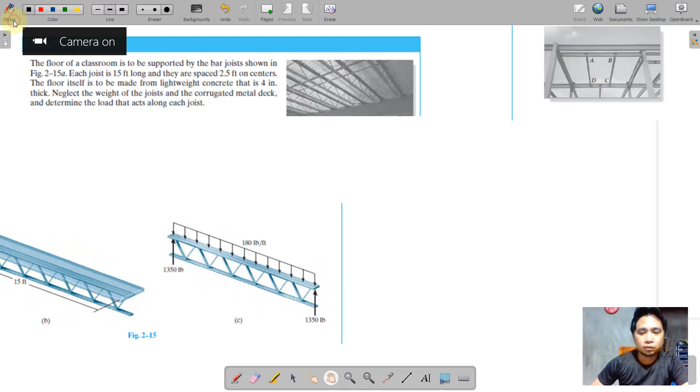This time we are going to have examples on tributary areas, how these tributary areas shall be transmitted on the structural member. And we should know first the tributary area, whether it is a one-way system or two-way system.

In this case, we have a floor of a classroom to be supported by the bar joist shown in this figure, and it is 15 feet long and spaced 2.5 feet apart. The floor itself is to be made from lightweight concrete that is 4 inches thick.

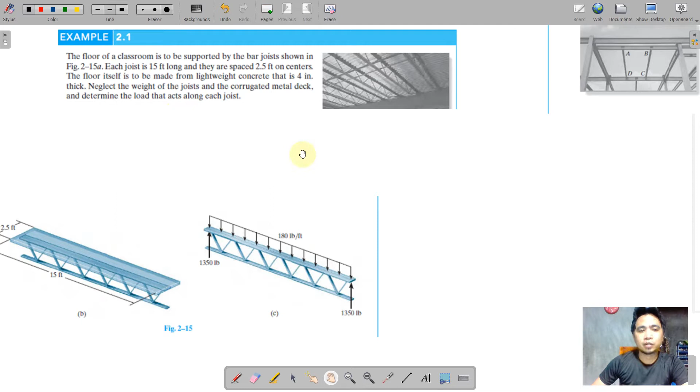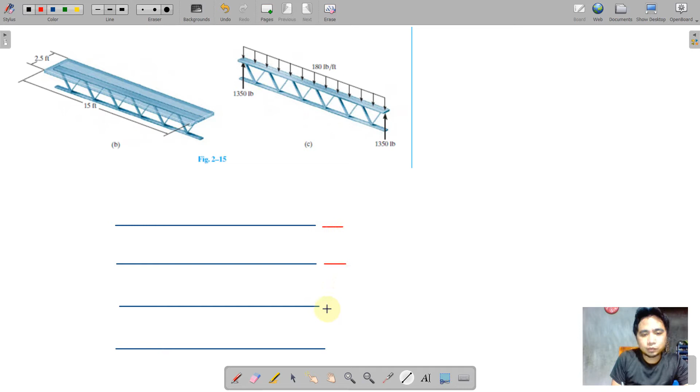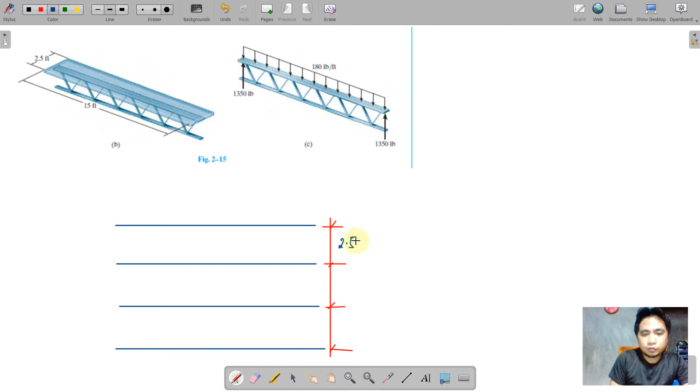Neglecting the weight of the joist, we are going to determine the load that acts along the joist, meaning it is just the distribution that we need to compute. So let's look at the top view, where we have a series of joists that are equally spaced, spaced 2.5 feet apart, and we have here 15 feet.

Recalling our initial knowledge on one-way and two-way slab, we should investigate the ratio of the longer dimension to the shorter one. If L over S is greater than 2, this is one-way system. And if the longer dimension to the shorter one is less than or equal to 2, this should be treated as a two-way system.

As a clue, a one-way slab looks like this: there is an obvious rectangular section wherein the longer one is twice the shorter one, or more than twice the shorter one. So that is the rationale. And if we have a two-way system, we have only a slight difference between the longer dimension and the shorter dimension.

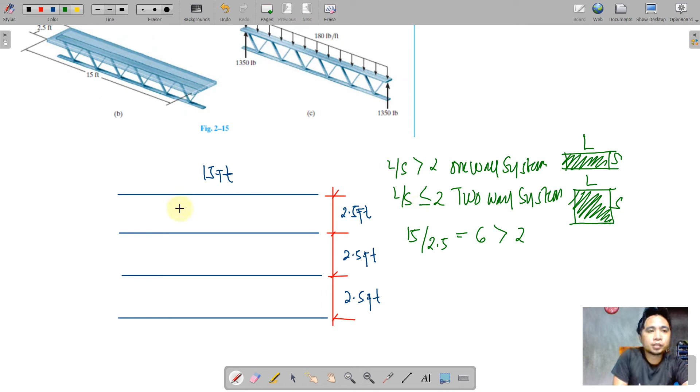So if it is a one-way system, we do not have to create a 45 degree line on the edges for its distribution. Instead we are just to consider half of the dimension of the adjacent flooring on both ends.

So if that is the case, we will be having a tributary area of 15 by 2.5. This is 2.5 because although we have them, they have half of 2.5 at both ends, except for the last beam, because the last beam will just carry a single coverage of the half of the 2.5.

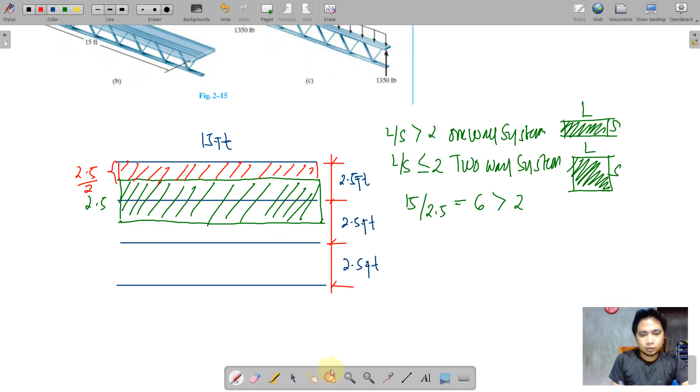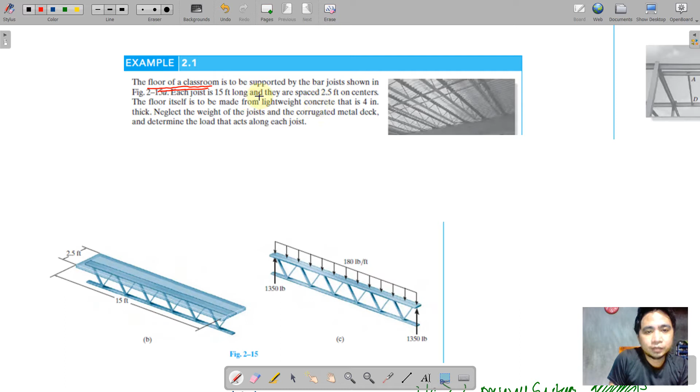So this is 2.5 over 2 on the edges, but we are trying to compute here the maximum loading of this joist in the system. With that, we are now going to determine what will be the loading of this floor system. So in the problem, we should know what is the material being carried by this floor joist, and at the same time, what is the occupancy. Here we have a classroom as the occupancy, and the material is lightweight concrete that is 4 inches thick.

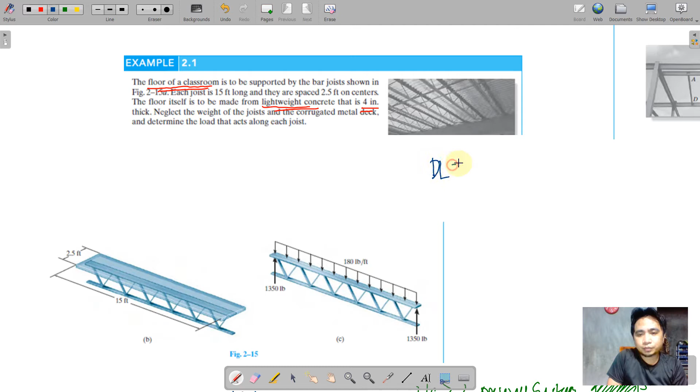First, let us look into the table containing the dead load. I think we should refer to table 1-3. We have here a floor fill that is lightweight concrete according to the problem, and that is 8 pounds per square feet for the English system, per inch. So floor fill, lightweight concrete, plain per inch, the unit here is pounds per square foot per inch, so that is equivalent to 8.

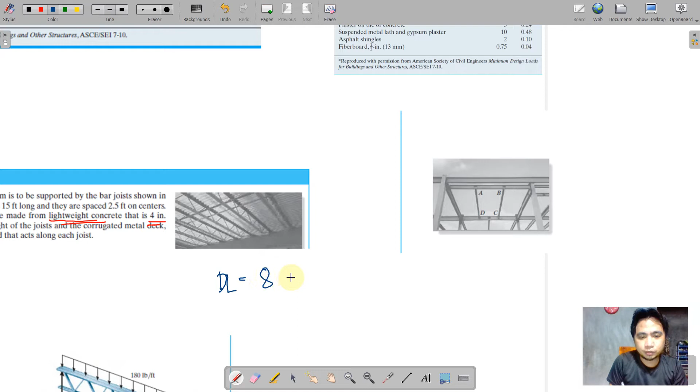Do not neglect the unit because that will be your basis. So we have 8 pounds per square foot, and this is per inch at the same time. How many inches? According to the problem, we have 4 inches. So if we calculate that, the inches will just be cancelled, and obviously that is 32 pounds per square foot. So express first all the gravity loads in terms of pounds per square foot.

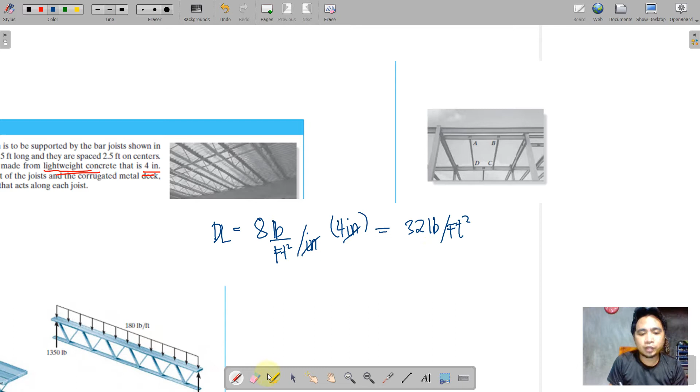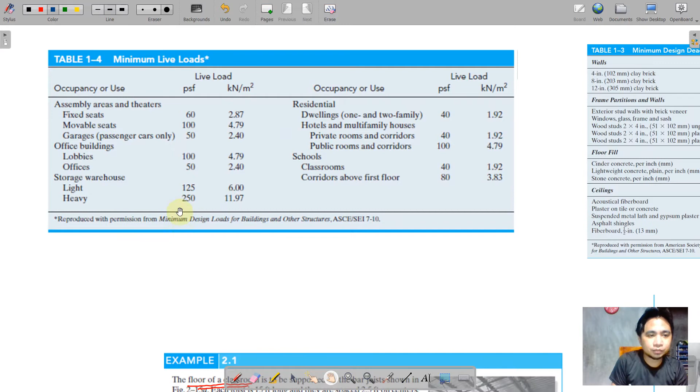Now moving on to the live load, if we have a classroom, we have a classroom that is equivalent to 40 PSF as the live load. So the live load here is 40 pounds per square foot.

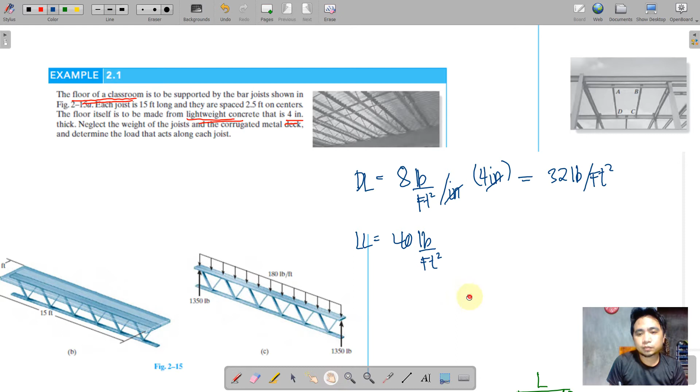So if we are going to add that one, all in all, we have a total load in terms of pressure. Obviously, 32 plus 40, that is 72 pounds per square foot.

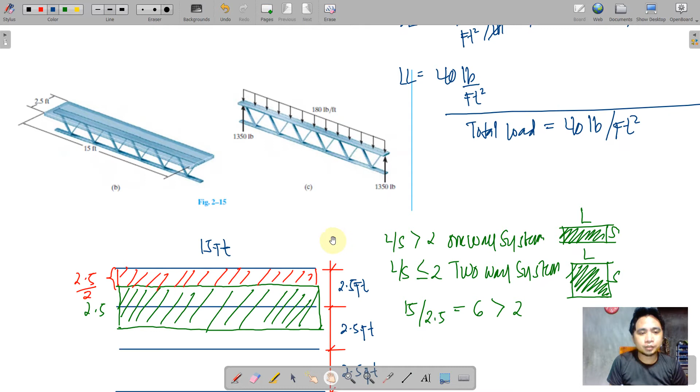And then next, we wanted to distribute this pressure along the length, or along the long direction. Why along the long direction? Because there will be no support along the short direction. At the same time, if we have a one-way system, the shorter dimension has no load to carry.

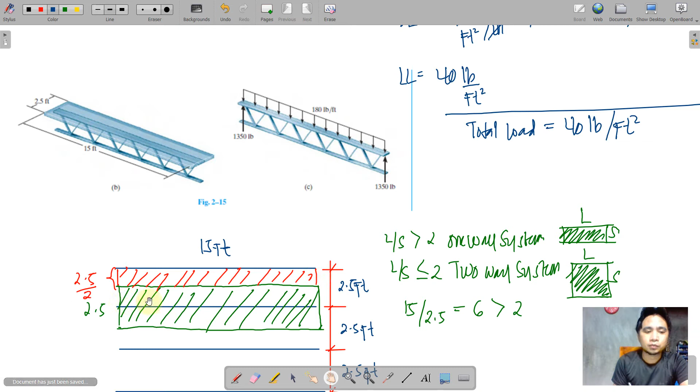So basically, we are going to multiply this 40 to the area. And what will happen if we multiply it by the area? Feet squared here will just be eliminated, and 40 pounds will just be the resultant.

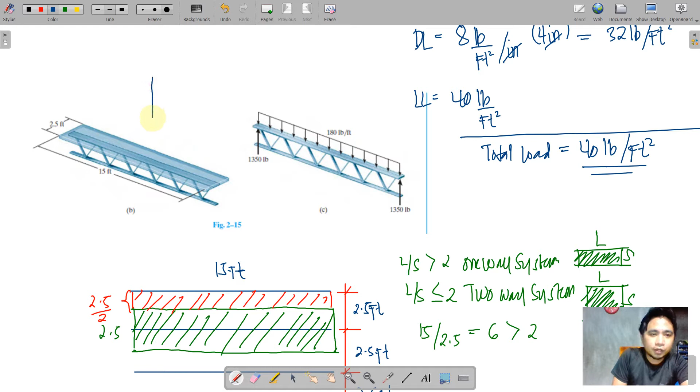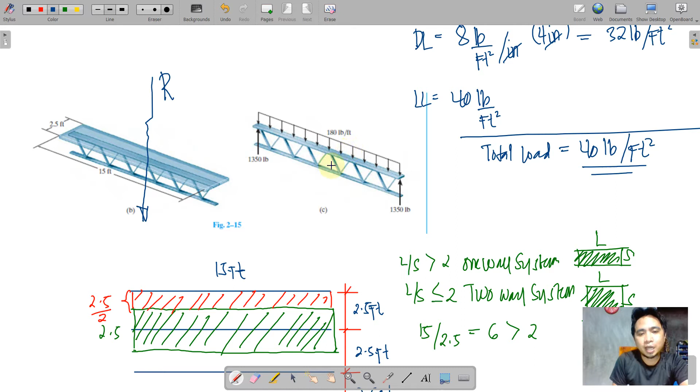It will become a resultant if it is being multiplied by 2.5 by 15. So we'll be having a resultant, and this resultant will be distributed along the length. That is the rationale. If this R is distributed along the length, it will become a uniform distributed load along the length. So that is the pattern of the solution.

So let us do that. We have to multiply it by 2.5 by 15. This is actually the tributary area. This now becomes feet squared, which is just cancelled. So we will be having 1,500 pounds. So we are going to distribute along the length.

So therefore, the W here, or the distributed load along the long direction, is equal to 1,500 pounds. Where shall you distribute? Along the 15. So this is divided by 15 feet. And then we have here 1.5...

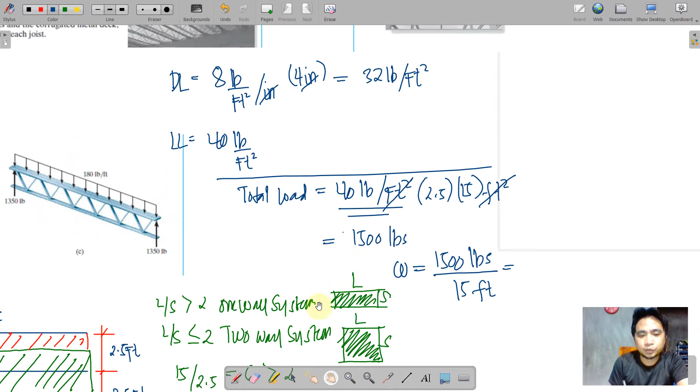Sorry, I'm so sorry, but we have 32 plus 40. That should be 72. So sorry for that. 72 by 2.5 by 15. May we recalculate that one? This shall be equal to 2,700.

2,700 pounds. And next, just the same, we divide it by the length where we wanted to distribute this. 2,700 divided by 15, we have 180 pounds per feet, and this is the answer for this problem.

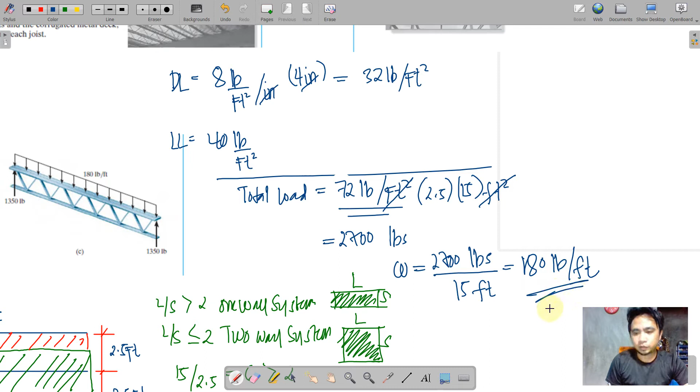Moving on to the second problem. We have here a flat roof of the steel frame building shown in the photo intended to support a total load of 2 kN per square meter over its surface. Determine the roof load within region ABCD that is transmitted to beam BC. The dimensions are shown here.

Obviously, on the dimension, it has already been indicated that this is a two-way slab because it has drawn a 45-degree line on each of the edges, and then we have a trapezoidal loading for the longer span and a triangular load for the shorter span. However, if this is not indicated in the problem, what is important is that we all know the dimensions of this figure.

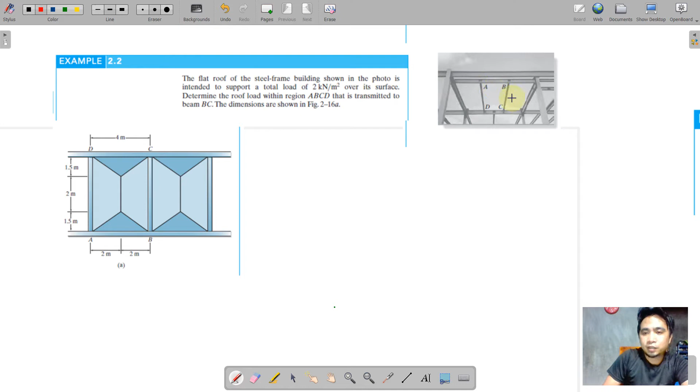So granting that this is equal to 5 meters on the figure and this is 4 meters, we can check the L over S, or the longer dimension to the shorter dimension. This is 5 all over 4. So obviously 5 over 4 is 1.25. Now this 1.25 is less than 2. So in short, there is only a slight difference between L over S.

And if this is the case, then we can say that this is a two-way system. So if it is a two-way system, again, we are going to have lines drawn at 45 degrees on each of the corners, and then just intersect it with this line.

Do not bother yourself by computing the area and then multiplying it by the loading and then dividing it by the length where you wanted to distribute. So what you do is just multiply the area, or we just multiply the loading in pressure. Loading in pressure is per square foot or per square meter.

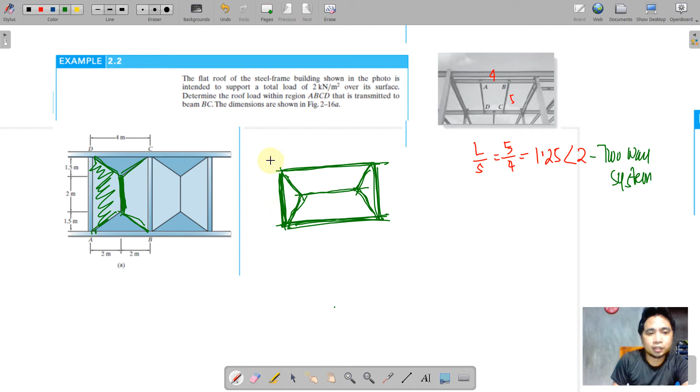So what you do is search for the triangle. Do not go for the trapezoid. Where's the triangle? Here's the triangle. And then look at the dimension of the triangle, or the length of the triangle, that is 4 meters, of course. And then you divide 4 meters into 2. Why? Because as we can see here in the trapezoid, it bisected the 4 meters here, and obviously this is 2 meters. So we are actually determining the peak of the W, and the peak of the W is on this range.

So next, we're going to have an illustration for that.

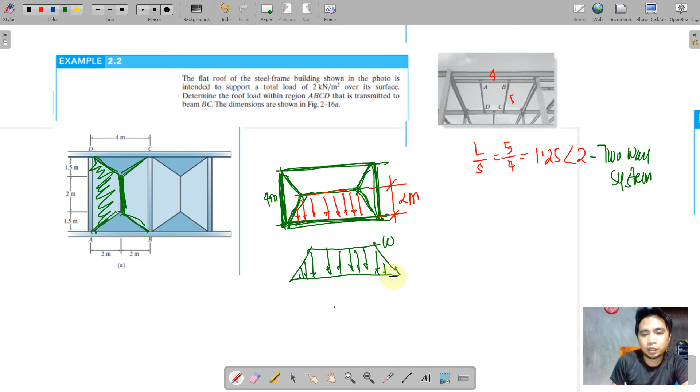We have here a distributed load. However, this is not uniformly distributed, it is a trapezoidal one. Of course we are going to have the W along the L, and then along the short dimension we also have a triangular one, and the highest loading here is W, and then it will yield to zero at both ends. This is the shorter one.

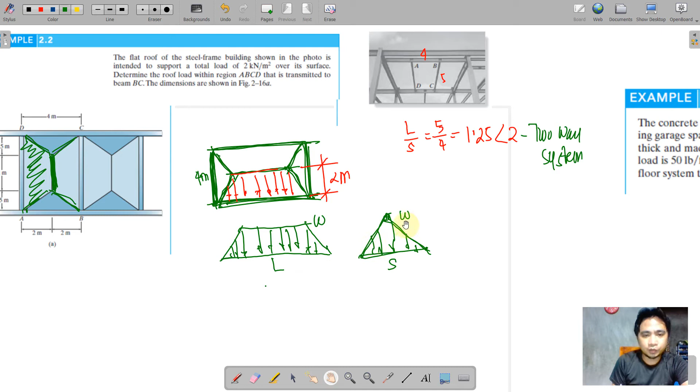So what you do is to get the loading first, and then we will look into the distribution by and by. In the problem, the total load is already given, so we do not need to refer to any table here. So 2 kilonewton per meter squared covers all the gravity loads that we need. So the total loading is 2.

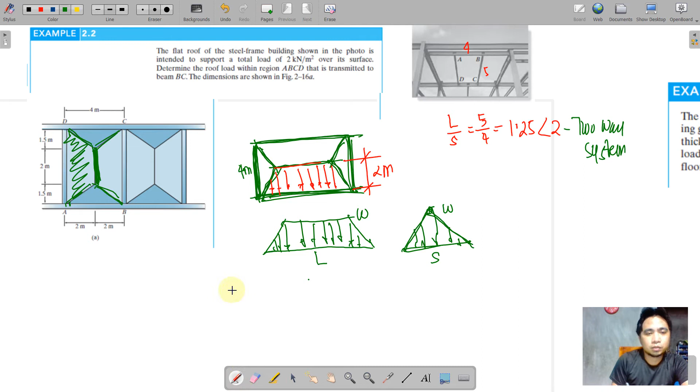So therefore, distributed W along the long direction is equivalent to the pressure, that is 2 kilonewton per square meter. So we're just going to multiply this by half of the dimension where the triangle is, that is 2. So as a summary, we have introduced that W here is the pressure times the half of the shorter dimension.

So what is the shorter dimension? That is 2 meters. So eventually we cancel one of the meters here, and automatically this is 4 kilonewton per square meter... 4 kilonewton per meter, okay.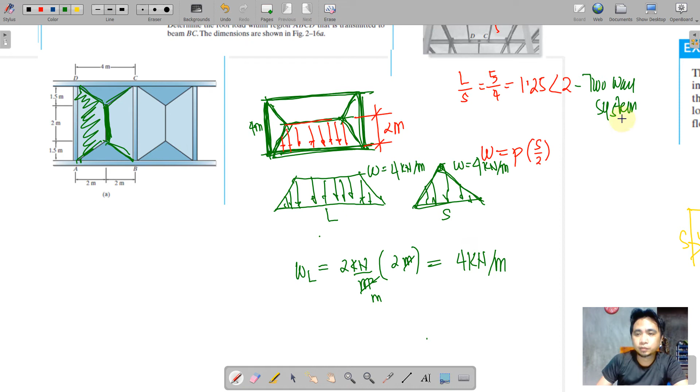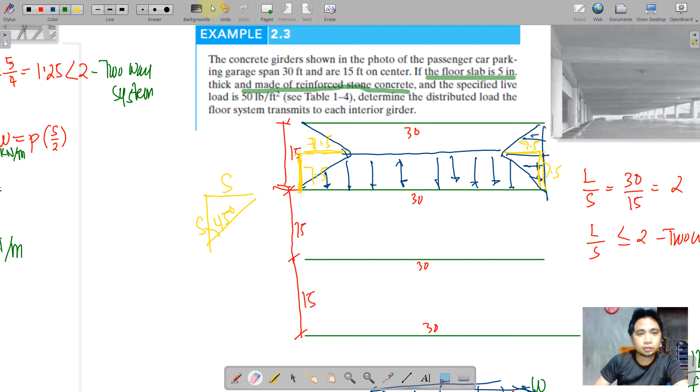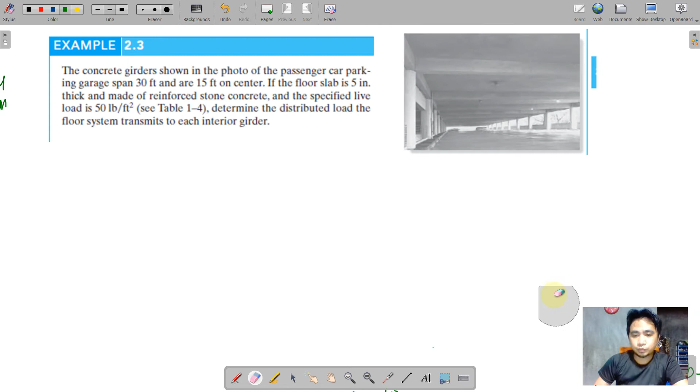So moving on to the third problem. We have here the third problem. So for the third problem, we have here a concrete girder. As we can see in the photo, we have an interior girder here. So when we say interior girder, there will be two slabs that are being carried by the girder.

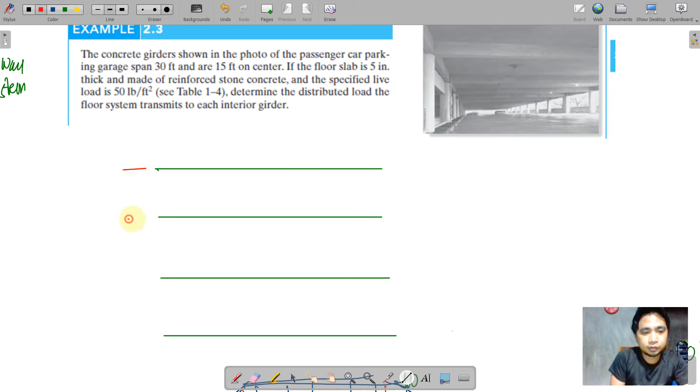So if we're going to illustrate that one, we have this girder, and this girder is about 15 feet apart. So this girder is 15 feet apart, okay, see, this is 15, and the length is 30.

So this is the orientation of the girder, wherein first we need to know what is the orientation of the girder. Is it a one-way system or two-way system? Of course we're going to investigate L over S, or the longer dimension to the shorter dimension. We have 30 over 15, that is equal to 2, and 2 is just equal to 2, right? So what is the indication? If we have L over S to be less than or equal to 2, that is treated as a two-way system.

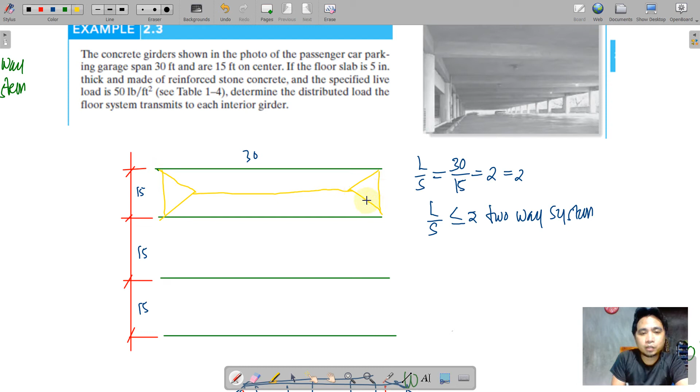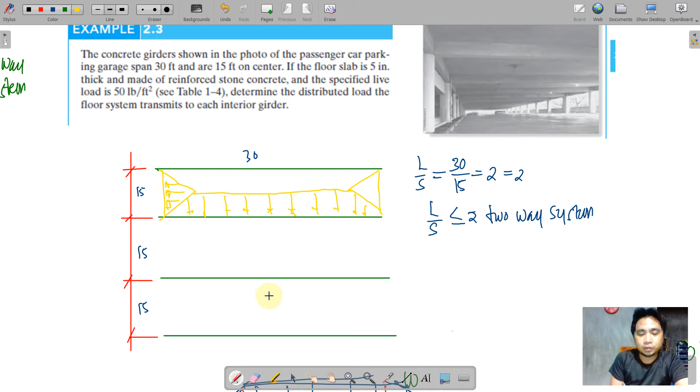So again, when we have a two-way system, we need to draw a 45 degree line here, so that the longer dimension will carry a trapezoidal load using the peak W, as well as a triangular load for the shorter span using also the peak W. So again, do not bother yourself calculating the trapezoidal area and the triangular area here.

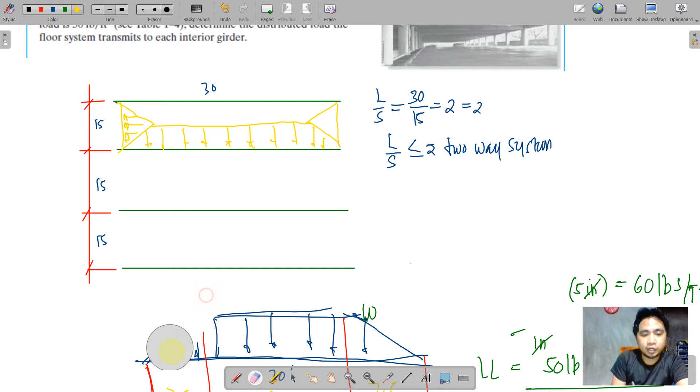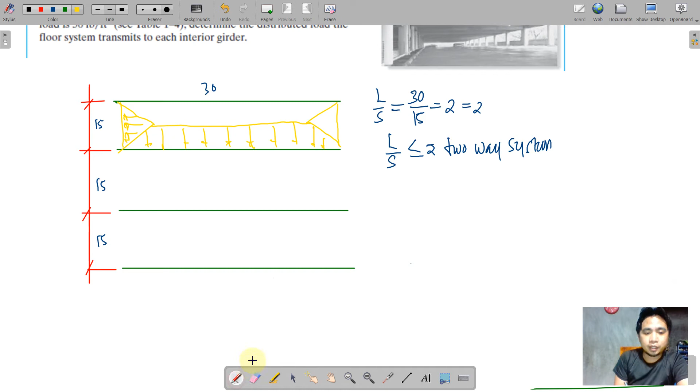So it is good to note also the distribution of the trapezoidal load according to the length, and we should note the transition between the highest peak up to where it will come back to zero. So let us draw now the beam. So if this is the longer beam, there will be a trapezoidal load here.

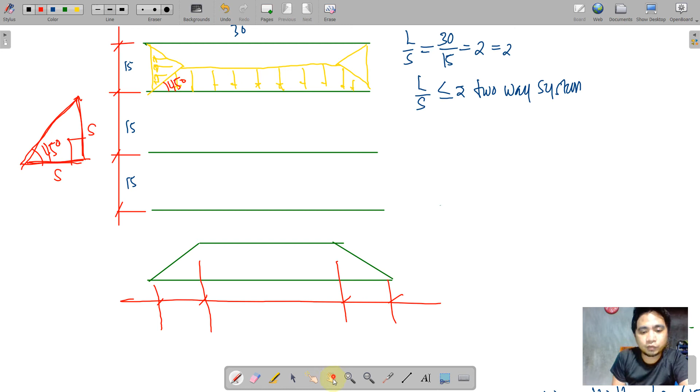Okay, so let us note now the dimension. So what will be the dimension of this one? Basing from this triangle, of course this is 45 degrees, and we all know that a 45 degree right triangle has equal legs, right? So it will have an equal leg for this right triangle, so that if this is S, then that should also be equal to S. Now if we're going to have this to be 45 degrees, the line here is a bisecting line along the short direction, isn't it?

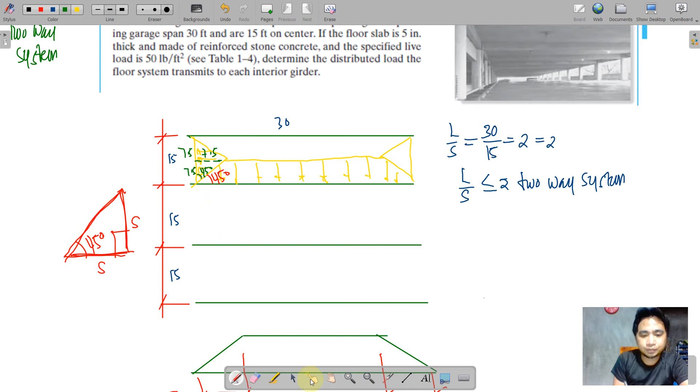It is obvious this is a bisecting line, meaning 15 will just be bisected into 2. This will be 7.5, so that this bisecting line is also 7.5, because this is 45 degrees. Applying the principle, if we have 45 degrees, they have an equal leg to that. So in short, this is 7.5, and this is also 7.5. So therefore, this is 15 in dimension along the shorter span.

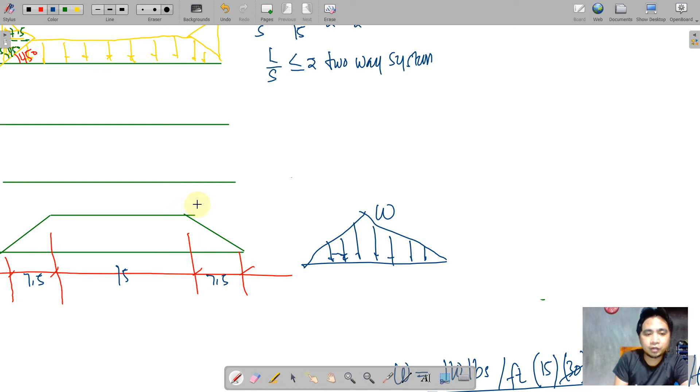For the shorter span, we'll just have to consider the shorter span, but the same W, or the peak W, that we need to derive here, the peak W. So what is the dimension of the shorter one? The whole dimension, which is 15 feet.

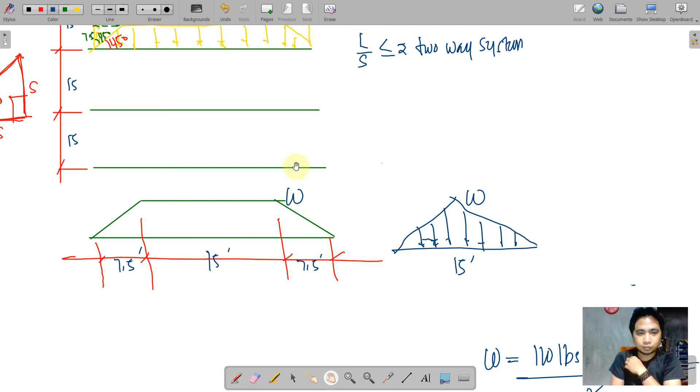All we need is the pressure caused by the gravity loads, whether live load or dead load, and then just multiply it by half of the shorter dimension. So the step is simplified into that.

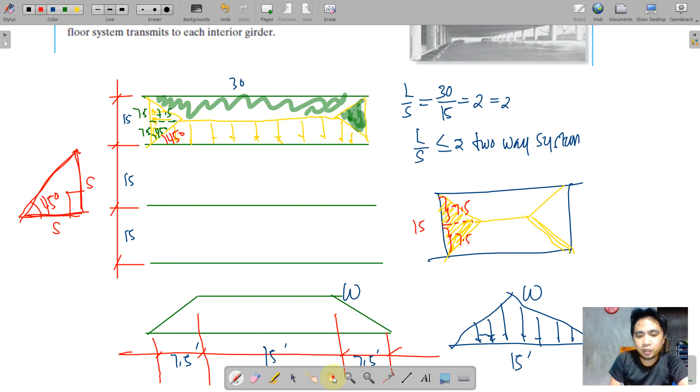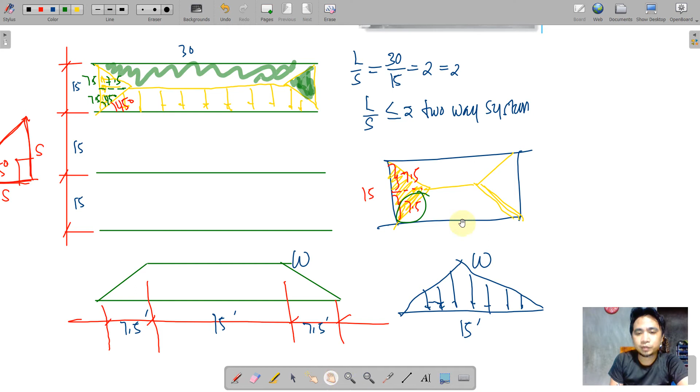So what we do when we have a two-way slab is first draw a 45 degrees line, and then search for the triangle. Where's the triangle? Here's the triangle. Then search for the dimension of this triangle, or the length of the base, which is 15 in this case. Draw a bisecting line there, and this becomes 7.5, which will be the multiplier for your derived pressure. That will be our W, or the uniform distributed load, or the peak distributed load on this trapezoid as well as this triangle.

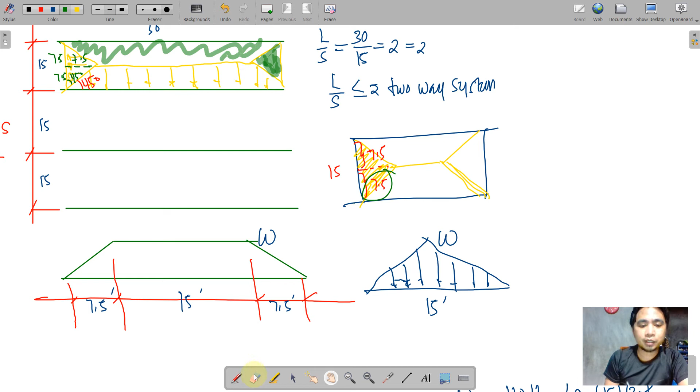So again, search for the triangle between the trapezoid and the triangle, and get the dimension of the triangle, or the base. In this case, that is 15. Just divide 15 by 2 because we have the bisecting line, and that is your multiplier now. Knowing the multiplier, we'll just get the total load caused by the gravity load.

So in this case, what are the gravity loads carried by this girder? We have here a floor slab that is 5 inches thick, made of reinforced stone concrete, so we refer to the table referring to that material.

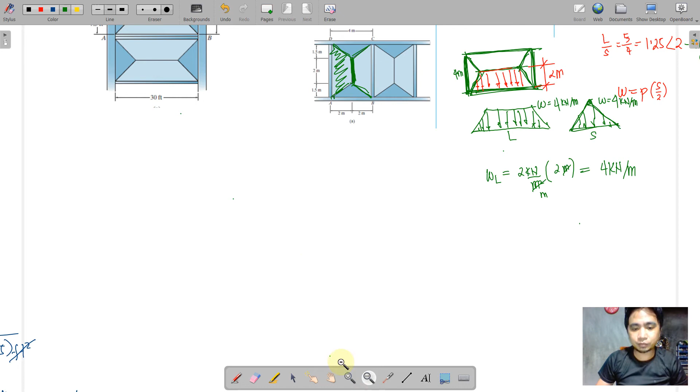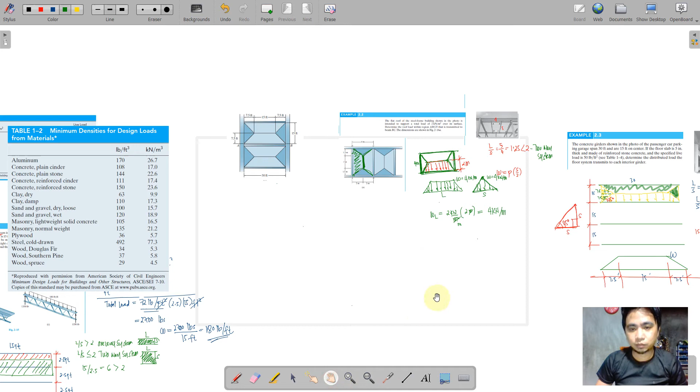Referring now to the table, we have two available tables, whether we use the pressure or the unit load, whichever is convenient to us. Table 1-2 presents values in pounds per cubic feet, and the other table is in terms of pounds per square feet.

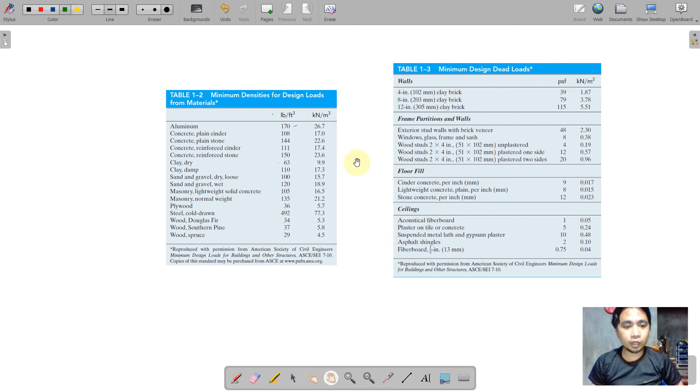So remember, we're looking at reinforced stone concrete. For the floor fill, let us recall that table 1-3 came from table 1-2. Say for example, the floor fill is in terms of pounds per square foot, and this PSF is derived from PCF. How is that? Let us investigate this.

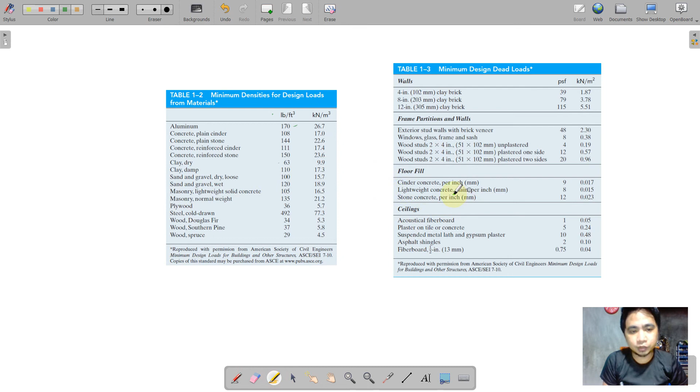A cinder concrete per inch—do we have a cinder concrete here? Yes, we have. That is equivalent to 111. So meaning if we have 111 pounds per cubic feet, and we multiply that by a foot, it becomes PSF, pounds per square feet. Now this 111,

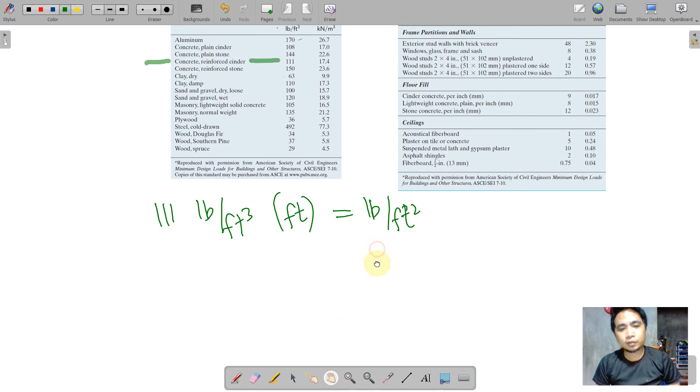we are going to express that into per inches. So if we are going to have a per inch unit there, say 111, 1 foot is actually 12 inches. So therefore, we have here 9.25 PSF. Do we have 9.25 here?

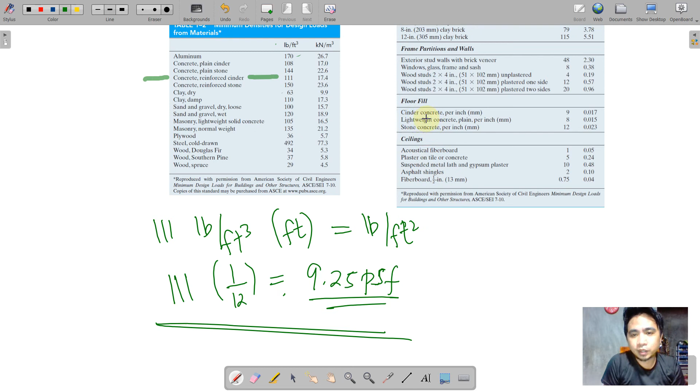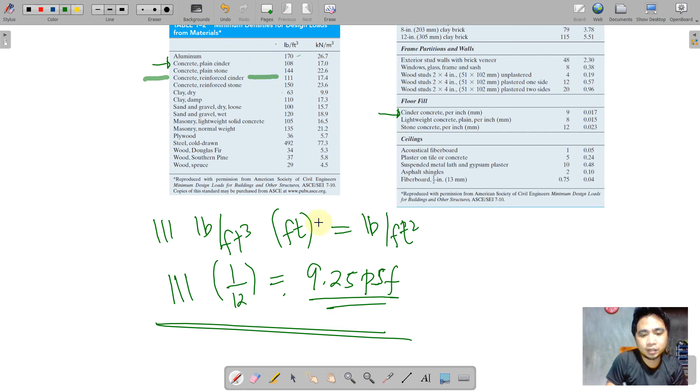None. Perhaps we have a mistake in selecting what is cinder here. So cinder here perhaps is not a reinforced cinder. Looking back to table 1-2, it is actually 108. Let us try that one. So 108 divided by 12, that is 9. So exactly 9 PSF.

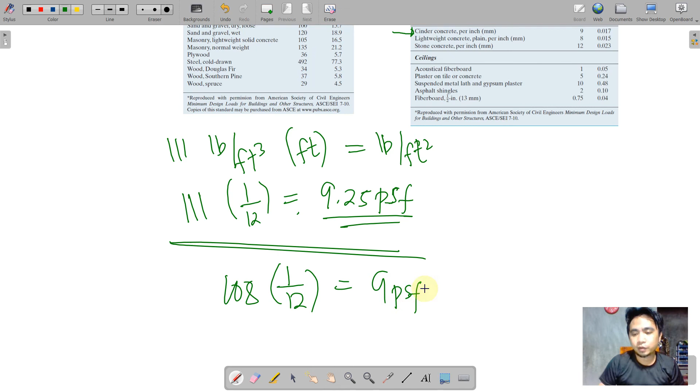So meaning this plain cinder here, cinder came from—that is not reinforced. This plain cinder here came from this. So 9 came from 108. And then concrete plain stone, 144 over 12 is 12. Stone concrete per inch is 12 pounds per square foot per inch. And then the lightweight concrete—we do not have a value for the lightweight concrete here. So that's it.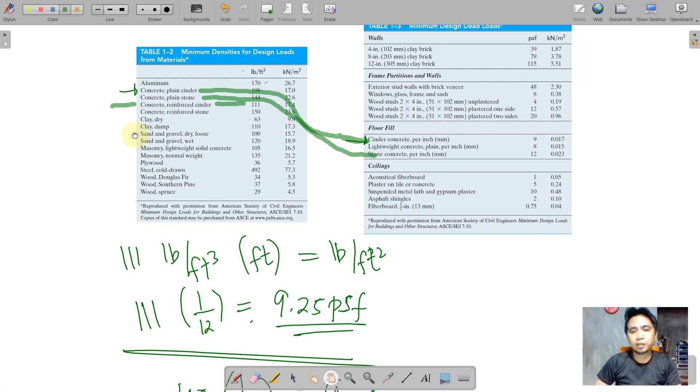In this problem we are looking at reinforced stone concrete. Looking at table 1-3, when we investigate the floor fill, we have cinder, lightweight stone concrete. Is it the stone concrete? I think not, because the problem specifies reinforced stone, not plain stone. So in table 1-3 we cannot find that item. Therefore we go back to table 1-2, because table 1-2 contains that item, and that item is this one.

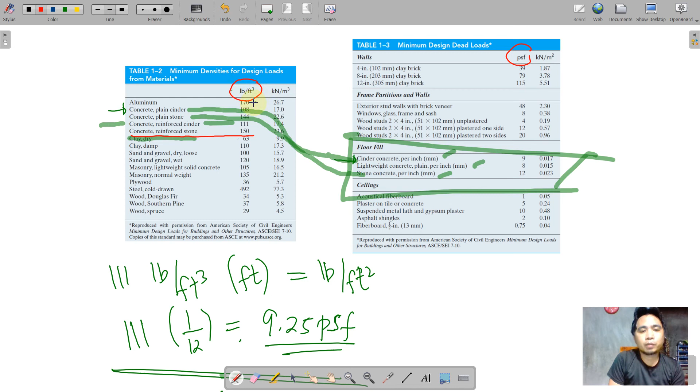Reinforced stone concrete is 150 pounds per cubic feet, and this will be treated differently, because this one will just have to be multiplied by the thickness and that's it. But this time we are going to multiply also by the thickness, and it will become the pressure. So, 150. Now we go back to this.

So W will be derived from the total gravity load. First we have the dead load, and that is reinforced stone concrete. We already referred to the table, that is 150 pounds per cubic feet. And then, what should we do?

If we multiply it by the thickness, we must be consistent. Say the thickness is 5 inches. However, this 5 should be converted to feet to adhere with the feet unit. There are 12 inches in 1 foot, so we can cancel that, and 5 will be in terms of feet. Now this is cancelled. So all in all, we have 150 times 5 divided by 12, that is equivalent to 62.5.

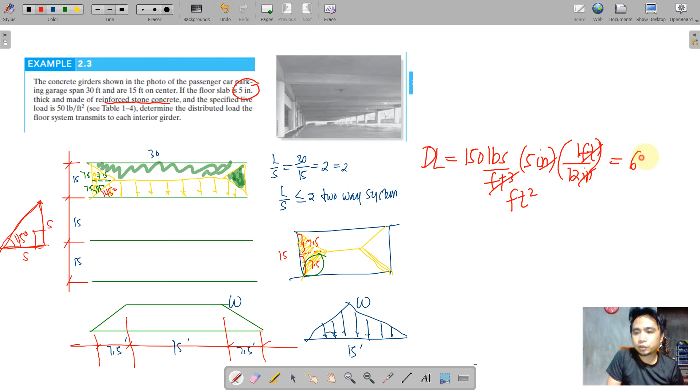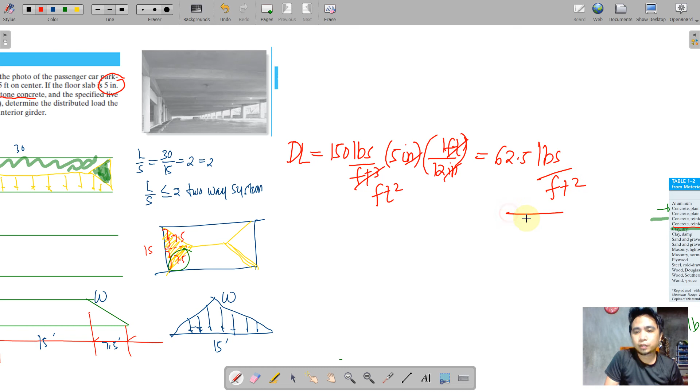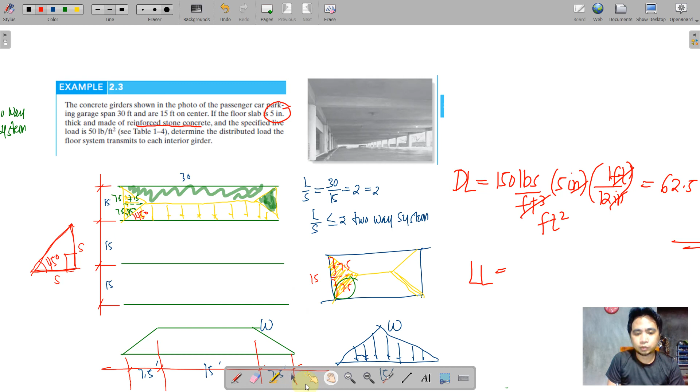Pounds per square foot. And then for the live load, it is already given, so 50 pounds per square foot. We will do nothing to the live load, that is already pegged to be 50 pounds per square foot. Adding the two, therefore we have 112 pounds per square foot.

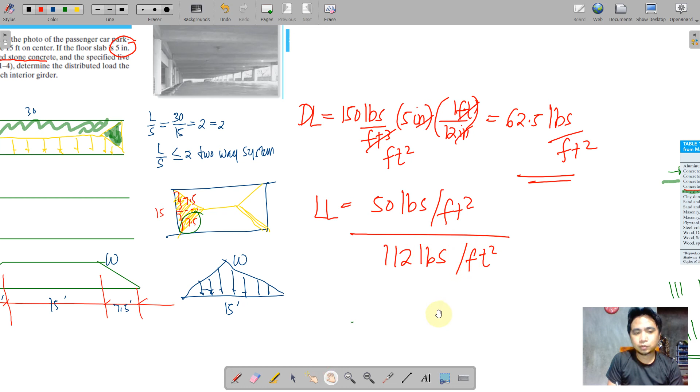Next, what will be the tributary load of this long direction? Again, the tributary load is a two adjacent slab. So if we divide the 15, that's 7.5, and this is also 7.5, just the same, this is also 15, and that is 30. So if it is a two-way slab, again we are going to have a bisecting line on the edges at 45 degrees.

So finally, W is equal to, let us carry that one, the pressure multiplied by half of the dimension of this triangle. What is the dimension of this triangle? 15, half of that is 7.5.

This is feet. And then finally, W is 112 times 7.5... sorry, 112 pounds per square foot times 7.5... we have 62.5 plus 50, that is 112.5. Sorry.

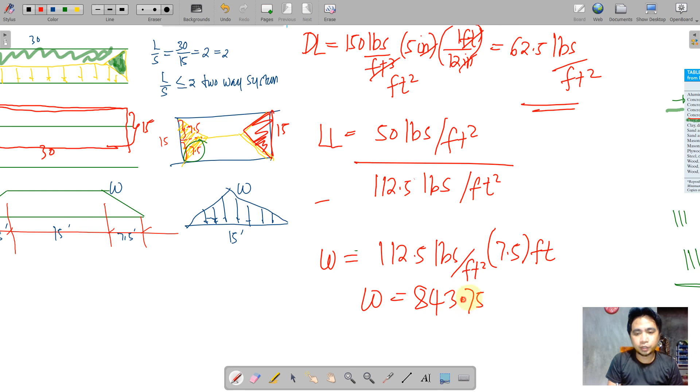That is 112.5. So this should be also 112.5 pounds per square foot times half of the 15 triangle there, 112.5 times 7.5, that is 843.75. So we have 843.75.

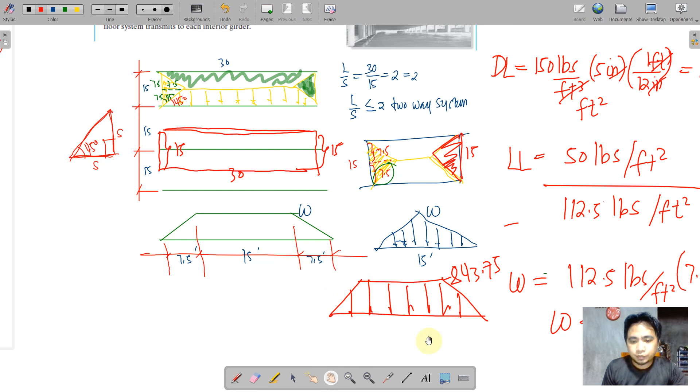So this W carries a single trapezoid here. Remember that. A single trapezoid carries 843.75. Now, if we refer to the interior beam, as we have said, it carries two dimensions, so that it will carry two times 843.75. So W for the girder total is...

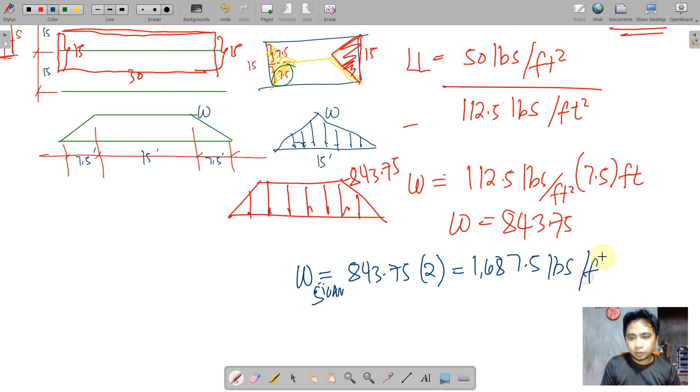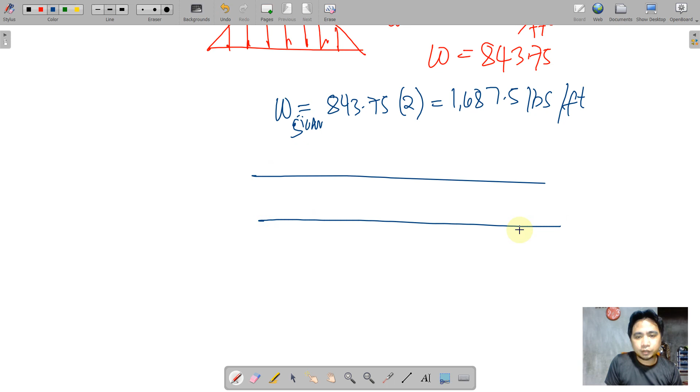843.75 multiplied by 2, that is 1687.5 pounds per feet. So why is that? Again, let me explain. If these are the girder, okay, we have the tributary areas. Of course, this is 15 and that is 15.

So what we have computed here is a single span of the trapezoid, that is 843.75. But what about the other one? That is why we are multiplying it by 2, or twice it, because these are identical trapezoids here. That is why we have 843.75 times 2. All in all, we have 1687.5 for this girder to carry.

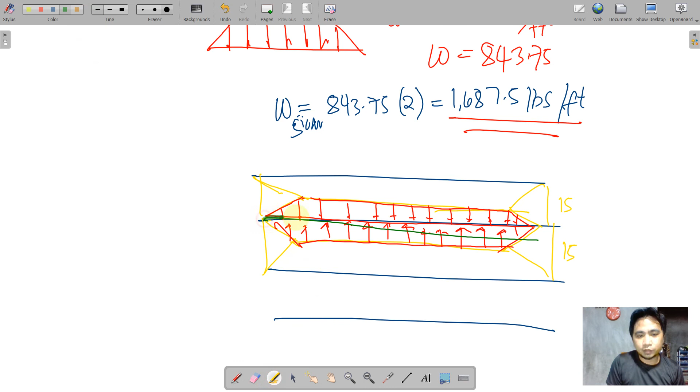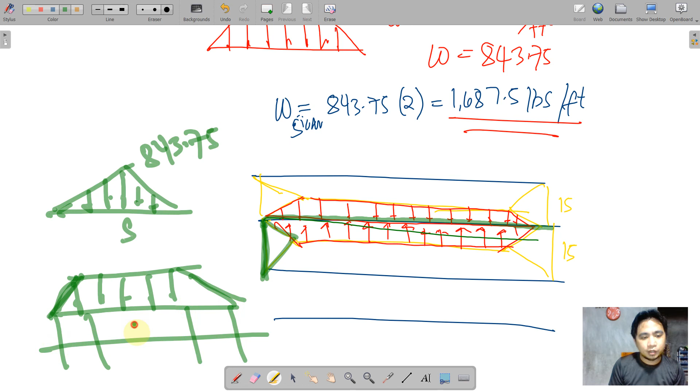Okay, for that girder to carry. For this girder to carry. So for the shorter dimension, it will just carry a single triangle here, equivalent to 843.75 as the peak W for the shorter dimension. And for the longer dimension, we have 1687.5, which is a trapezoid. So this is 15, 7.5, that is 7.5. This is 1687.5. Okay, so that's it for this problem.